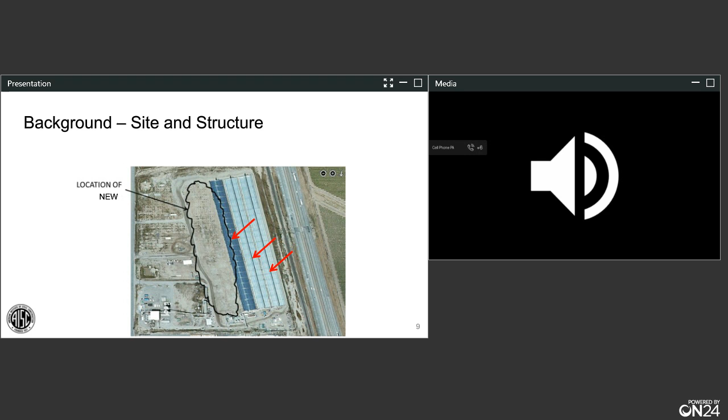It's important to note that there were three similar rows already constructed, and they were working on one of the final rows when the incident occurred.

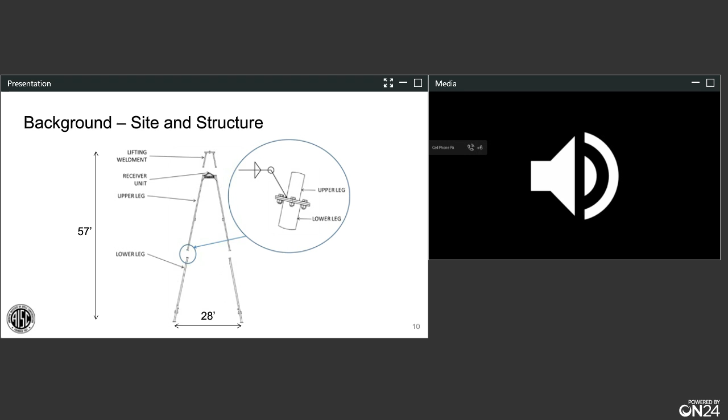So letting your eyes adjust to this photo, this is a schematic of one of the frames. As you can see, they're very tall and quite slender, constructed of tubular sections delivered to the site in parts. The whole structure is 57 feet tall and 28 feet wide. There's a lower leg attached to an upper leg, the upper leg has a receiver unit sitting on it where the tube is, and above that is a lifting weldment used to place the structures.

Just a quick overview of the erection process. Each frame was put in place, lying on the ground. Once all the frames have been constructed, a crane lifts them vertical. Once vertical, they're tied to the ground, and then using a chain and winch process, the tube is lifted up into the location where it will finally sit.

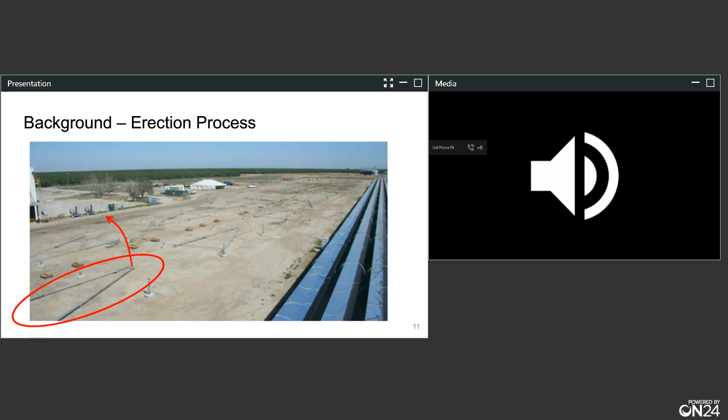As you can imagine, and why we're looking at this failure, things didn't go well. Partway up, they're lifting the tube here - you can see it just below the height between the lower and upper legs at that connection. There's no water in it yet, but the weight of the tube alone caused the frames to suddenly buckle.

All right, so that's the background I'm going to give each one of you. At this point, I'd like to check in with each of the contestants. Based on the brief information I've told you, I think there's certainly enough there. So John, you're up first - what do you think was the root cause of the failure?

Well, real quick Ron, being the earthquake guy, I'd like to blame it on an earthquake ground shaking. That didn't happen. But if you remind everyone about the previous slide, that weld failure was the cause - it wasn't a big enough fillet, it was poorly placed potentially, and it snapped right between the upper and lower leg. So fundamentally, the cause of the failure is that weld you see on the screen. Yeah, that's certainly a heavy weld failure there, John, we can see it in that picture. Well, thank you for that, John.

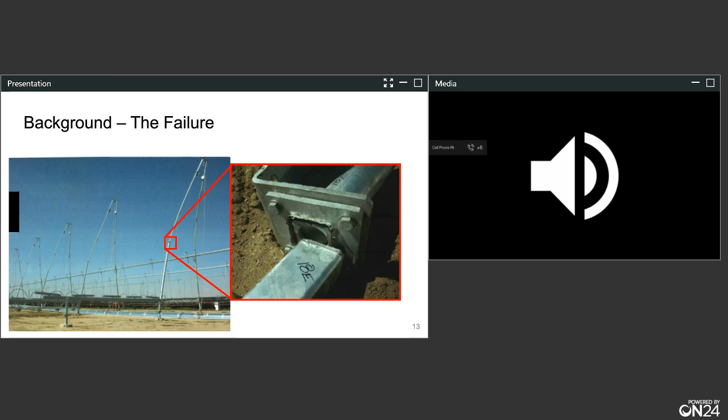So let's check in - John indicated a weld failure. The professor is up next. Tricia, what are you thinking?

All right, when I first saw that photo of that tower, the first thing that jumped out at me is those spindly little spaghetti sticks that they call legs. These just looked tiny, probably inadequately designed. Perhaps the engineer made some inappropriate assumptions when checking the buckling load of those legs. An easy place to go wrong is those idealizations we often make for the boundary conditions. Maybe they assumed the bottom was fixed when there actually was some rotation there, or maybe they assumed the top had the translation fixed and actually it could displace a little, but I think there was probably an inadequate design to those legs of the frame.

All right, so you think it was in trouble from the beginning. All right, yeah. Thank you, Tricia. All right, Cliff, what's your thinking?

Thanks, Ron. I think that this is related to poor construction sequencing. I think the engineer probably got this right. It's pretty hard to screw up the capacity checks, and I think the weld was fine, looks like a pretty beefy weld to me. I think it was just erected out of sequence. In other words, the contractor lifted the weldment or the A-frame assembly into place and didn't brace the top of it before he started lifting the pipes. And when you have a 57-foot tall flagpole on spindly little legs, as Tricia said, I think you would be expecting a failure that we saw.

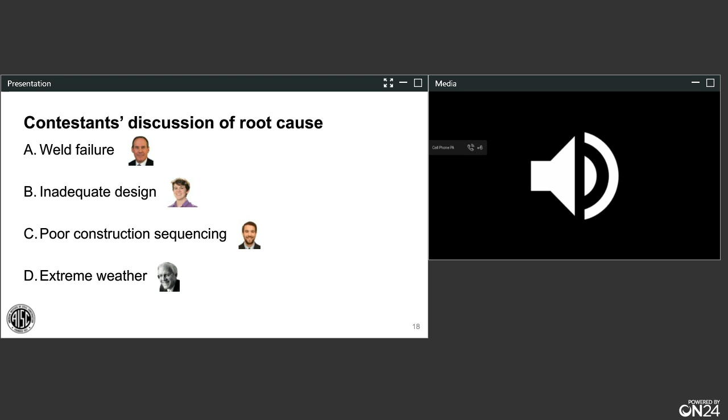All right, well, that is definitely complicated, but could certainly make sense. Extreme weather could have been driving this. As I indicated before, thanks to the contestants for their thoughts, and all 4 of these are certainly a realistic possibility. I'm now going to switch over to the audience and see what the audience thinks. So we're going to do a quick poll. Be sure to vote which one you think: was it A, a weld failure, B, inadequate design, C, poor construction sequencing, or D, extreme weather?

All right, let's start the poll, shall we, Nate? So Larry, it's always wind about you, right? You think it's vortex shedding. Are you sure about that?

John, what I do know, it's not an earthquake phenomenon. Well, I readily admit that up front, but I'm not sure about the wind. We'll have to wait and see what the audience thinks. I know you're an earthquake guy, but from a wind perspective, there's a real possibility here. Yeah. It's definitely a slender system, so quite interesting. Yep. Cliff's got my interest piqued there with that bracing.

So, all right, let's see how we did here. Ooh, very interesting. We had about 12% of the audience check in on a weld failure. About 31% came in with an inadequate design. And looking down a little bit further, poor construction sequencing received the most votes, but still only about 50% of the audience. And Larry, sorry to report, but you only grabbed about 6% there on those agreeing with you that it could be extreme weather.

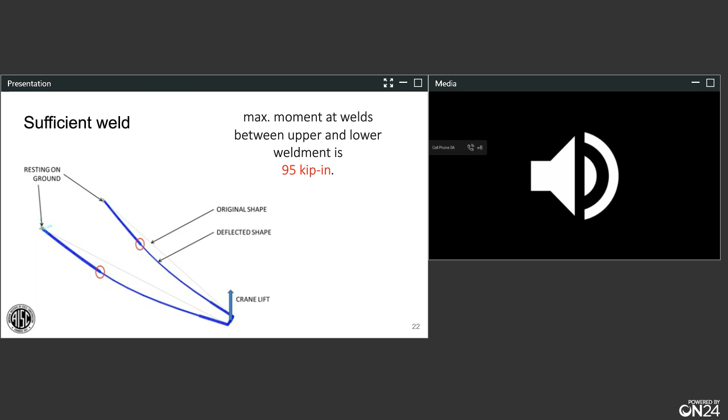So next we said, let's look at what's really going on here. If you can't test it, the next thing we do is take it to finite element land. We ended up modeling this connection.

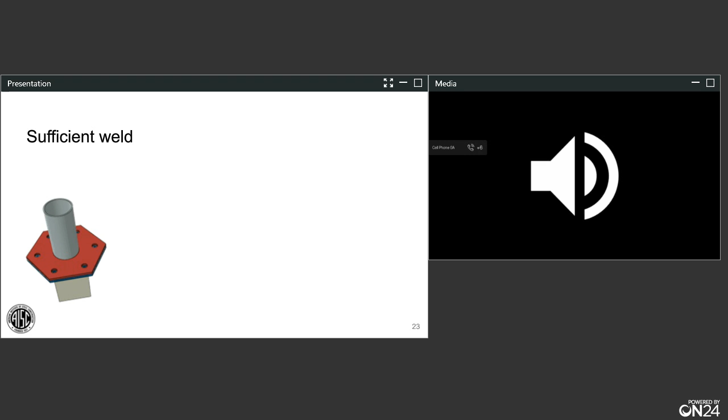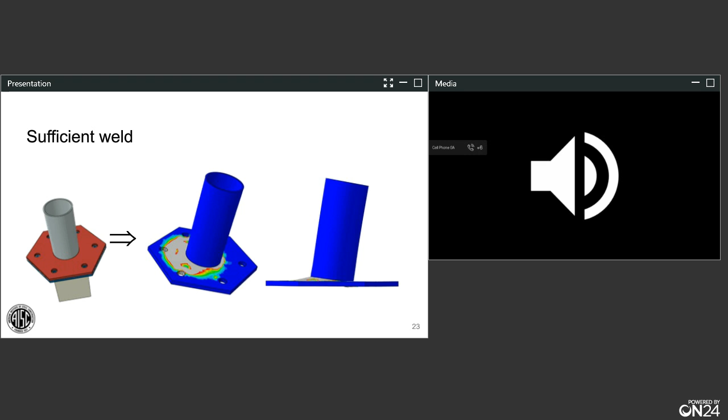Using those two pieces of information, we put together this slide. What we're seeing here is 4 different bars. The weld design is the load that was to be on the welds when this system was in use, when it's operating and has the water in the tubes. We normalized that to 1.0.

The weld capacity, based off of the measurements and our finite element analysis, corroborates that we had about 9 times the capacity there. The tower tilt-up actually put almost 6 times the demand on it than the weld design itself, or than the tower was supposed to be operated under. Lastly, the receiver load just prior to buckling was somewhere around 1/4 of the design.

So ultimately, the welds were sufficient, and the damage we saw, the broken welds, were related to large displacements associated with the collapse of the structure. In other words, the structure came down and then the welds broke, not the other way around.

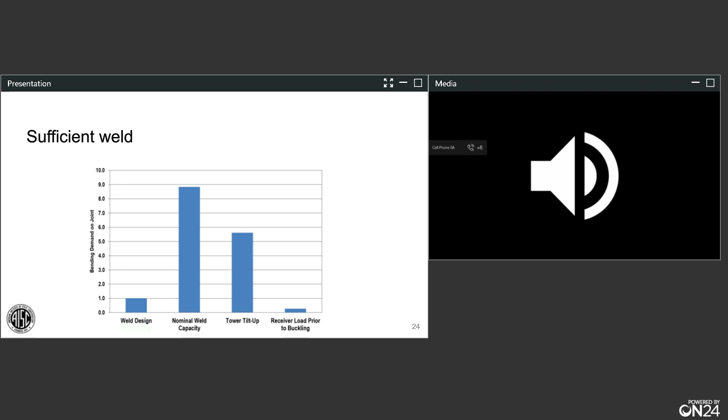We also checked the design. In this case, the system was not braced at the top, right? These are just freestanding towers. So we performed an analysis of the system, and we varied the out of plumbness of the tower, as you might do in your designs, with an out of straightness between the top and bottom, assumed as L over 1,000.

The design was pretty adequate. If we just looked at 3 models: a self-weight only model unbraced at the top gave a calculated buckling load of 17.8 kips. Case 2, the receiver being lifted plus the self-weight of the tower, unbraced, is about 6.1. The receiver plus self-weight if braced at the top is around 30 kips. The weight of the tower plus the receiver is about 6.9.

So essentially, case 2 never stood a chance, right? When you started lifting the receiver, you couldn't get this to work.

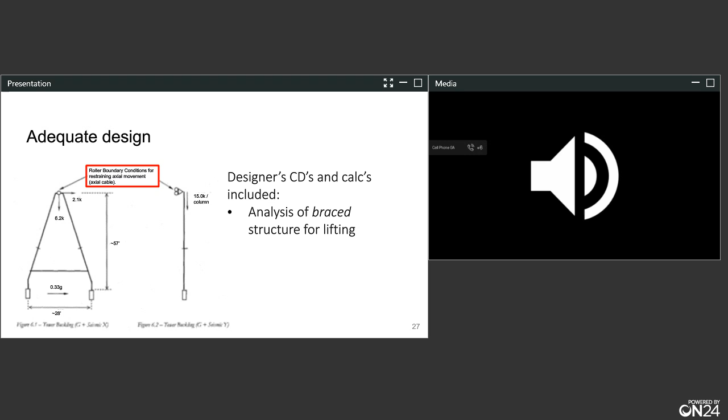So what does that mean? Well, it's an adequate design, right? We think the designer's CD and calcs included things like the analysis of the braced structure for lifting. So that means the engineer considered that the top of the tower was going to be braced during the lifting process. The only case considered unbraced was the case of wind. So they considered it unbraced for wind.

So you might say, well, how did they get 3 of these built and the last one not built? Because the contractor said, we're delayed. Can we move along faster by not guying these towers, which they had done on the previous 3? And the engineer wrote back, yes, you can do that. So in this case, the engineer ultimately directed the contractor in the erection procedure.

So essentially the engineer's fault. But then you might also say, well, the contractor did not consider the slenderness of the frame and double-check the engineer, right? Maybe the contractor should have second-guessed the engineer. So maybe it's the contractor's fault.

I will just leave you on one parting thought. The engineer who signed off on this in the unbraced condition was a mechanical engineer, not a civil engineer. So maybe that'll make you feel a little better that you probably would have gotten the Euler buckling load check and would have noticed that this was going to fail before it happened.

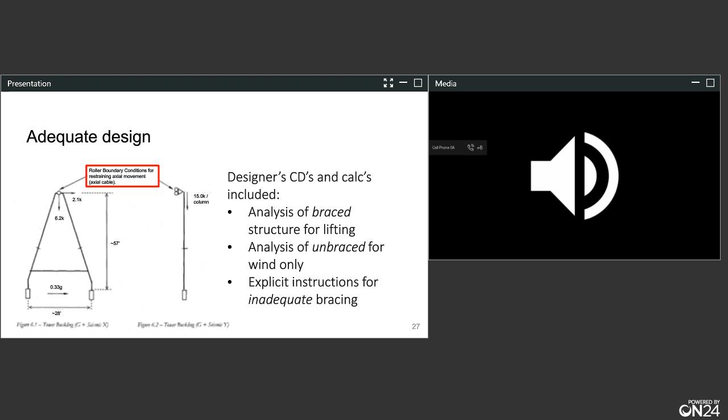So, Ron, I guess I'm going to turn it back over to you for the next case. Very good. Well, thank you for that thorough description of what happened. Certainly a very interesting failure.

Let's move on. So the second case for our contestants here is a dome scaffolding collapse. First big mistake that they did with these tanks is they built them out of concrete. So, of course, being SteelDay, we wouldn't even be having this conversation if these big tanks were done out of steel, but so it goes. We've got 7 digester tanks, numbered from 17 to 23, so it makes me think there's a bunch more somewhere else. These are good-sized tanks, 125 feet in diameter.

So what's that, about 40 yards? Half a football field. They're about 50 feet tall, good size, and the tanks are about a foot thick. So these are pretty hefty beasts.

The base is a little bit difficult when you go to construct that roof system. So the base is slanted towards the inside, circumferentially slanting towards the inside to bring everything towards the middle to drain out. To get that concrete roof system in place, they used a set of aluminum falsework that was used to support the formwork and do the deck pours up top.

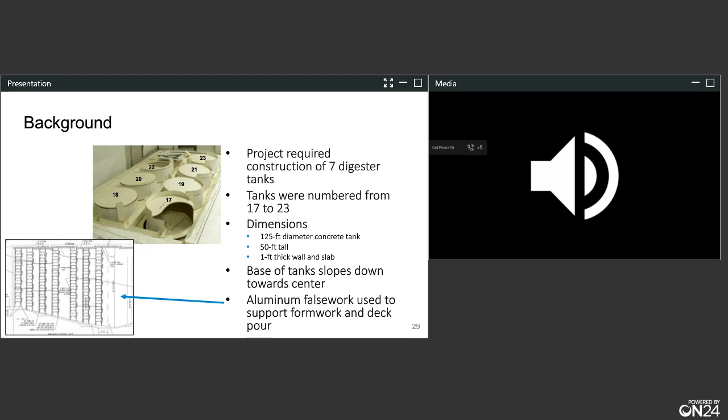Tanks 17 and 18 had already been constructed. The roof decks had been poured, no incident. So again, similar to that previous case study, there were some successes in the bank, but still a failure occurred. Tank 19 was ready for a concrete deck pour, and tanks 20 and 21 had the falsework almost fully installed, but they weren't quite ready for the concrete. So we're going to focus on tank 19.

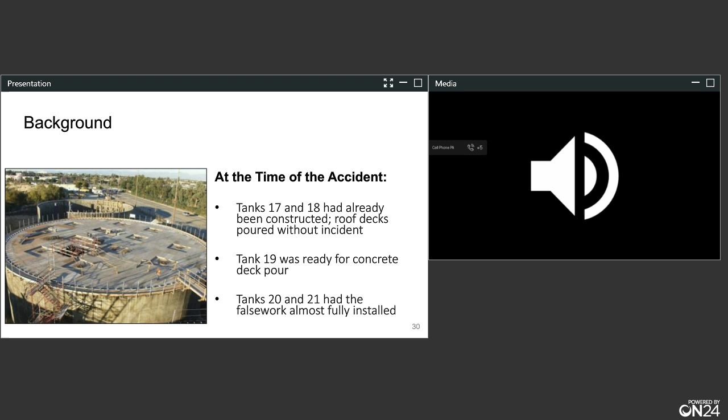Now, at the time of the accident, they were placing concrete on top of the tank to provide a roof system to the tank. It was being placed moving south to north, not circumferentially moving inward, but one side all the way to the other. About half of the concrete had been placed when the accident occurred.

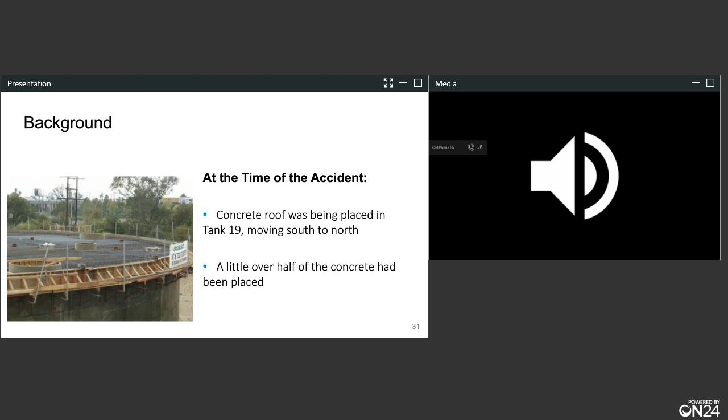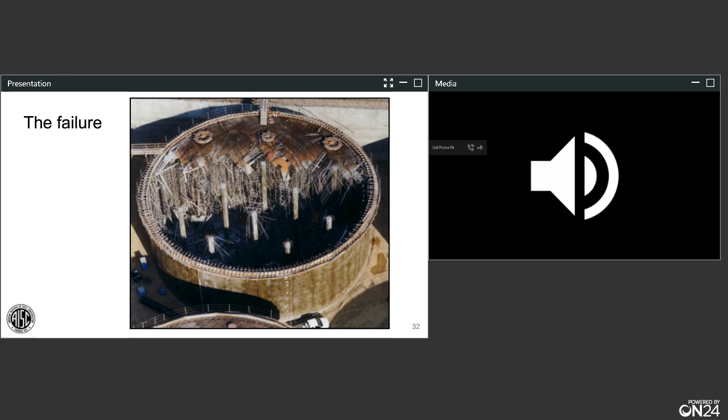Always tough for structural engineers to see pictures like this. Here it is, the system collapsing, and you just sadly see only a portion of the system supported, and then looking inside there, just horrible sighting of all that scaffolding collapsing and the like. So a messy picture, tough to look at.

The failure—well, certainly the falsework supporting it was aluminum, so that's what was holding everything up, and it dropped in. There were 29 people on that roof deck. 14 of them were injured, 4 very seriously, and thank goodness none fatally.

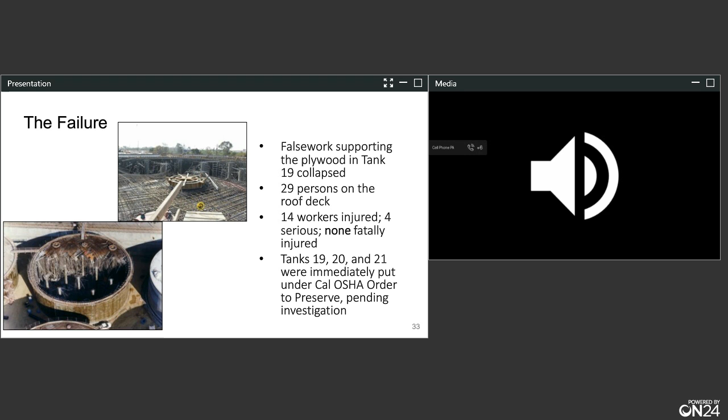Tanks 19, 20, and 21, right after that failure, were immediately put under a California OSHA order to preserve, which means everything stopped and nothing would continue until a thorough investigation was completed. I want to show you a little bit about that scaffolding. So we're looking inside now.

The plywood formwork up on top for that concrete was supported on top of aluminum beams. These aluminum beams were layered on top of each other to get the loads over to the shoring towers, which were also made out of aluminum, and that's the system.

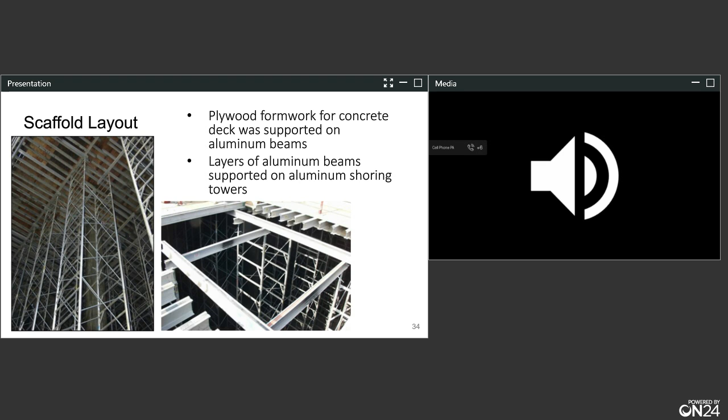If we have a look from the inside at the shoring system, looking up at the top and down at the bottom were screw jacks, and these screw jacks were needed because the inside tank was tilting inward.

Let's see what else I've got for you. Many of the towers, by the time the screw jack was all the way up, still could not reach the base of the aluminum beam, so they had to put in some substringers, and these substringers could be anywhere from 12 to 16 inches long, simply sitting on top of the screw jack and below, supporting the aluminum beams.

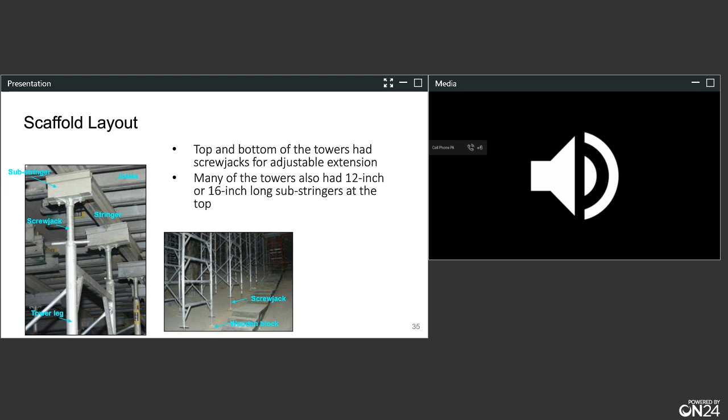Again, another picture of that very slender scaffolding system and those screw jacks down at the bottom, which, boy, they look mighty slender down there. And again, they needed the screw jacks because the floor is not level.

This is, again, a tough picture to look at, but when you arrive at the site, this is what you saw: frames fracturing, welds fracturing, couplers failing, substringers at the supports failing, substringer web buckling occurring for those substringers that didn't just fall in. We've even got some cross brace connections that were either missing or had also failed.

So, what was the cause of this failure? And that's why we've got these four contestants that are going to be working with us. Let's see, Larry, you're up first. Larry, what are you thinking on this one?

Well, Ron, I don't see any wind issues on this one, that's always my first thought. But what I do see is a lot of questionable details in this shoring system. And the fact that you mentioned the planning on the height of some of the scaffolding wasn't the best, and there clearly were some last-minute decisions, putting in this substringer at the top to extend the scaffolding really creates a highly questionable detail. And it sure looks like this one's a no-brainer in the sense that we got a case of web crippling, or web buckling, on these substringers, which clearly were an afterthought. So I'm going to go with these top substringers being the source of this particular failure.

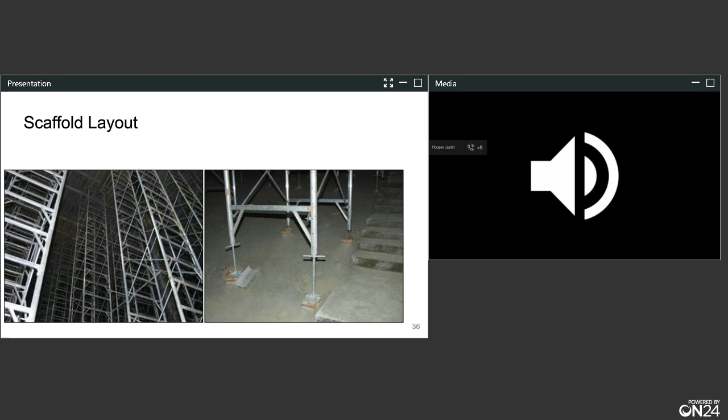Okay, well thank you very much, John. Very interesting. Cliff, you're on board. What are you thinking, Cliff?

Thanks, Ron. I think it's simply a case, even bigger picture than John's. I think it's just too much concrete. The engineer didn't calculate this correctly. They started pouring the concrete. You got some deformations in the shoring tower system because the shoring towers are so high, as we've seen a few times in that slide 36. And so what happened is you started to get a deflection, and that required more concrete, and you put in more concrete, and then you got more load, and that gave more deflection, and then essentially just too much concrete, too much weight, system came down.

Very interesting, Cliff. Combining that with the fact that they didn't uniformly load up the entire system, as we saw, they went south to north to south to south to north. Very plausible. So there are four here that, I don't know.

Let's see what the audience has to say. So we're going to jump over to the audience and ask them to check in. So what do you think, folks? Please vote. Was it A, stringer web buckling? B, screw jack extension? C, inadequate bracing of the shoring towers? Or D, there was just plain too much concrete up there and the system couldn't support it?

Please start your voting. Ron, being SteelDay, you'd think it would be just too much concrete, right? It just doesn't fit. I mean, so, John, you didn't see any earthquake effects on this one?

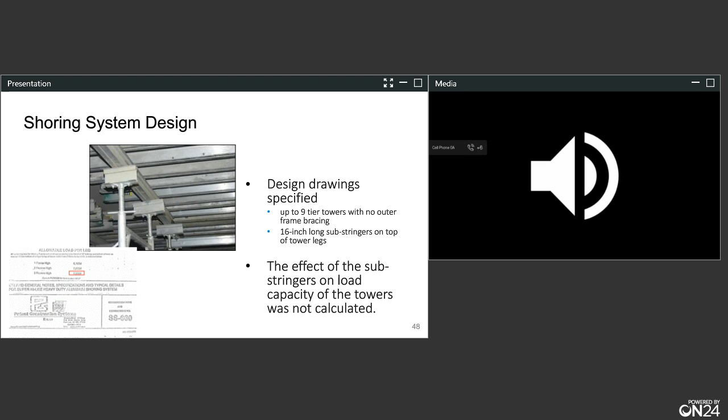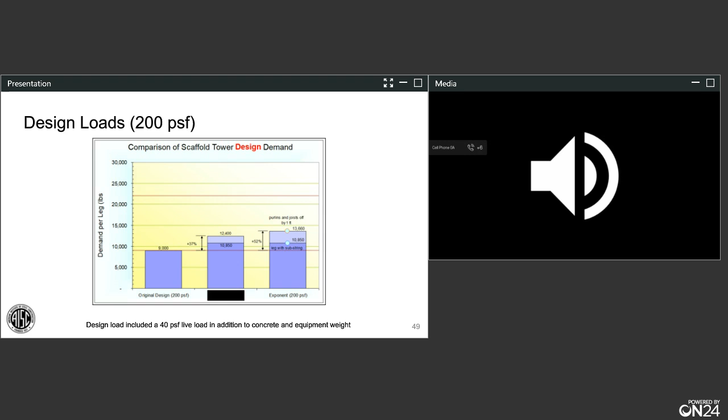So the actual loads, that was the design. The actual loads that were on there were around 7,200, so a little bit less. And again, what we actually calculated for those capacities.

So I know we've got to pick it up a little bit. So we actually conducted full-scale testing. We were incrementally loaded. This is actually a test setup we made, and we incrementally loaded these to failure.

Essentially, the web buckling of the substringer is what led to a global collapse. The peak loads that we got on these legs were around 14,000, 13,000. And then the failure load was significantly below the design level of 22,000.

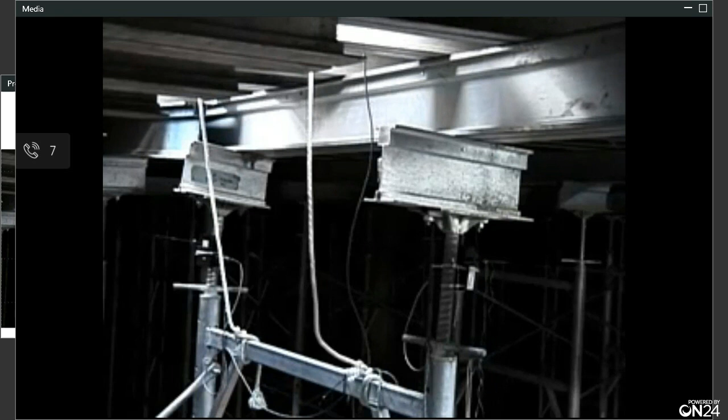So let's do the video. I want to show you a video of our test. All the video is going to show is it's pretty boring until it happens, so just take a look. I won't talk over it, but just to let you know, we're loading, and then we get a failure in the web stringers.

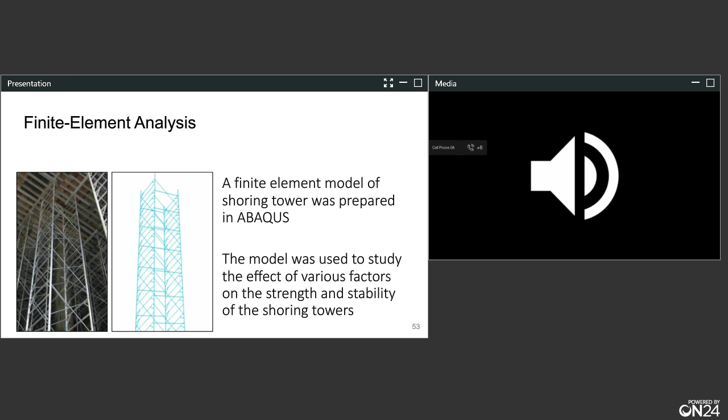So we prepared a finite element model of the system to check out the bracing that was used, and to look at it from a finite element standpoint. And again, we looked at all these different variables.

And again, the screw jacks did have some effects. The no bracing in the outer frame did have some effect, but it's really the substringers that drove the bus on this. So that's the end of this one, and I'll turn it back over to Ron to start case 3. Thanks a lot, Cliff.

Yeah, that one always reminds me, you've got to be very careful whenever you run a wide flange section over the top of a column, and make sure that thing is properly secured and properly braced.

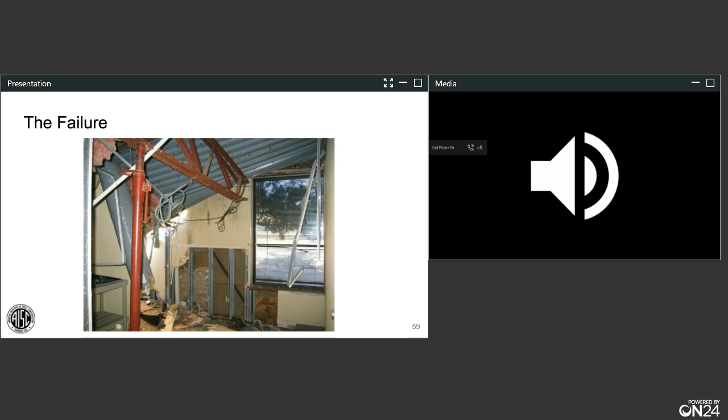There is a screw jack that has been placed just temporarily to hold that open web steel joist up. It's important to see that the open web steel joist, at the joist seat, has come off the header that was supporting it. So let me show you a picture here, how the design worked.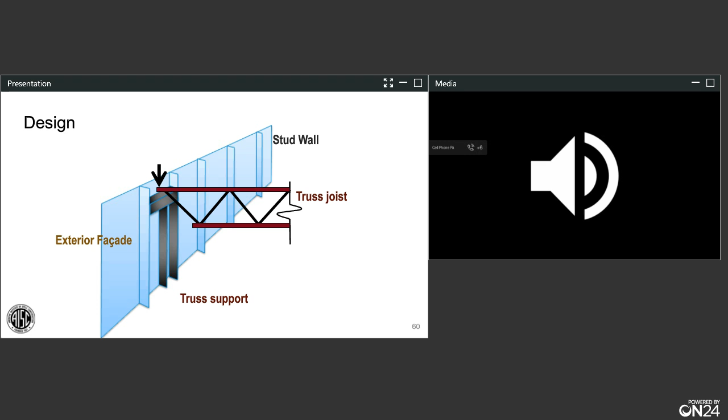We had an exterior facade. We had stud walls in place. We need something to support that open web steel joist. Unfortunately, it falls between the stud walls. So they provided a secondary system to support the truss. The load from the truss is now bearing on top of that header, and then it will find its way left and right into that truss support system.

All right, so with that brief overview, contestants, can you give me a quick check-in? How are things going? What are you seeing? Let's see, let me check my records here.

Tricia, you've been pretty convincing this far along. The audience tends to be agreeing with you a lot. What's your thinking on this one?

I gotta say, this is probably not the structural engineer's fault. It was Oklahoma, rainy season. I think maybe there were some drains clogged on the roof, a big rainstorm came in, maybe there's scuppers on the side that didn't allow all that water out, so the rain loads and the ponding were more than what was considered in design. So an overload on the roof due to the rainstorm.

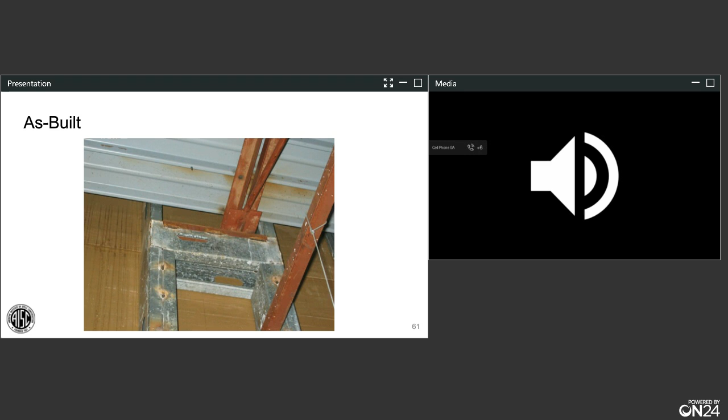All right, thank you Tricia. John, you and Larry are struggling a bit here with points, so let's put one on the board, shall we?

All right John, thank you very much. Larry, you're up, what are you thinking Larry? Well, I hate to say it, but I could agree with John here, but I think overall this is a pretty questionable design. It just shows you got to get the right engineer on the job. Clearly the guys that looked at this one didn't get all the design requirements checked, so I think we should say overall this is just an improper design.

All right Larry, so it just was never going to work. So again, four very plausible solutions. There is a root failure, I'll describe that, but first let's go to our audience, see what they're thinking. So one more time, take your poll. Please vote, what did you think was the root cause? A freak storm, the system was overloaded and the structural engineer had no chance. Missing support, so improper construction. Local member effects, we basically crushed the web of that C-shape or C-shapes, depending if the load was actually in both of them. And then going into Larry with just an overall improper design, that's not the way to do it. So folks, please check in and let me know what you've got.

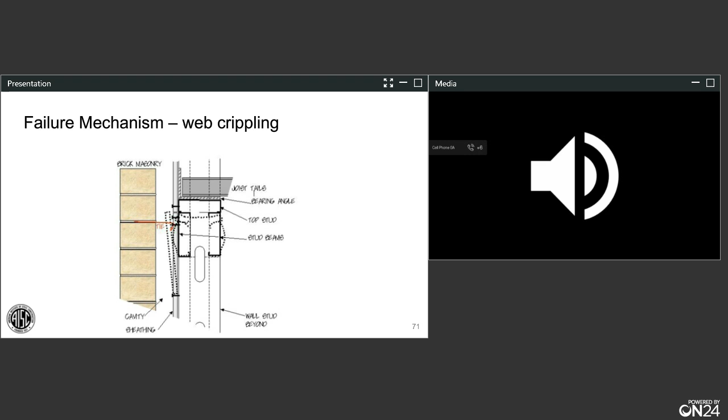All right, so a couple things about how we looked at this. We ignored the open section for the calculations right now - it's kind of an upper bound of our estimate. And then we went through and made some calculations.

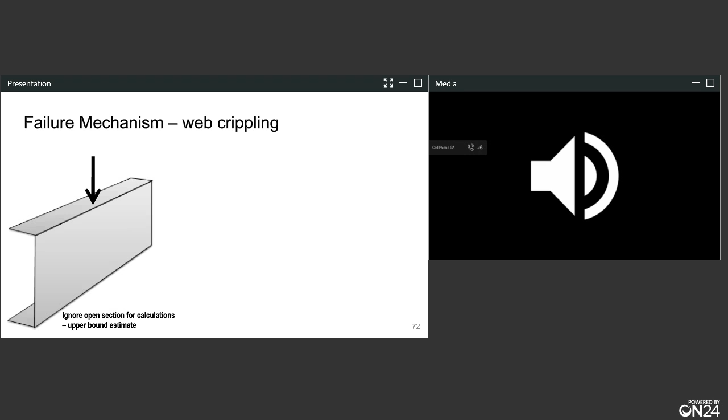The allowable load per the rain loading was supposed to be about 1.9 kips. We calculated a capacity of around 3.5. The non-factored loads, the actual loads that were there, were around 4. So we did have a lot of water on the roof.

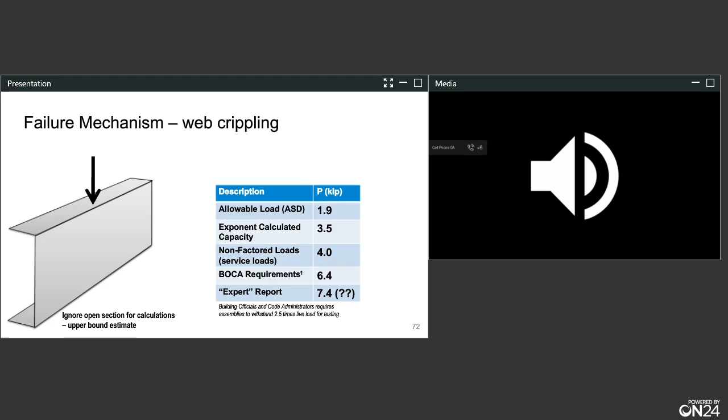The building officials require that it stands 2.5 times the live load when tested. We checked this because we were getting an expert report from other people on the project that said this couldn't have been web crippling because you had 7.4 kips of capacity. Looking at the tests that were produced, the test indicated the capacity of the bearing assemblies was at least 7,400 pounds, sufficient to meet the building code. So that was the argument.

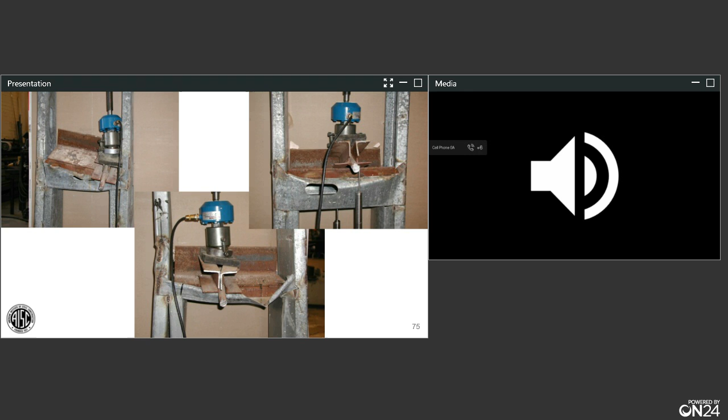Of course, if you continue to load in a test apparatus - look at the top right one - you continue to load and load, essentially your load point is just bearing on the additional studs below. So what we saw was, what is this design strength?

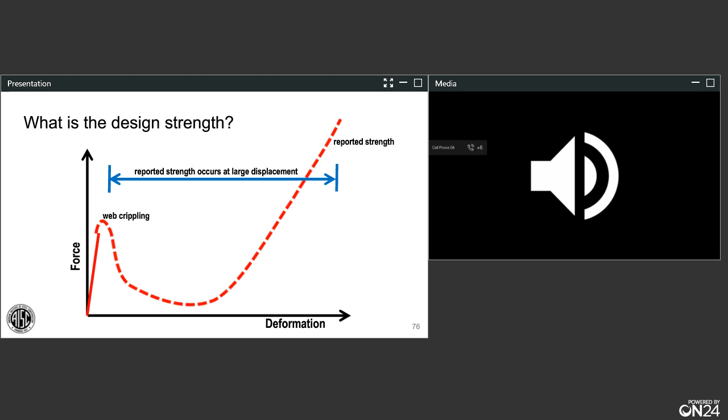Also, the reported strength occurs at this large displacement. What does that mean? Well, it means that once web crippling occurred, to get to this strength you would have a lot of rotation, and that rotation would then allow the joist to essentially slip off the bearing, which is what we saw in this analysis. So with that, I'm going to turn it back over to Ron to finish this up.

All right, Cliff, thank you very much. Yeah, that one is very interesting how that played out.

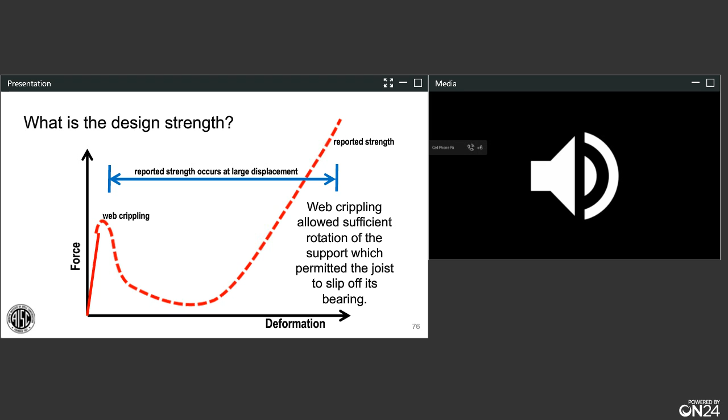Some closing remarks - where do you go on SteelDay but all the way back to the father of stability, Leonhard Euler: 'Since the fabric of the universe is most perfect and is the work of the most wise creator, nothing whatsoever takes place in the universe in which some relation of maximum and minimum does not appear.' So we saw some maximums exceeding minimums, and down came the system.